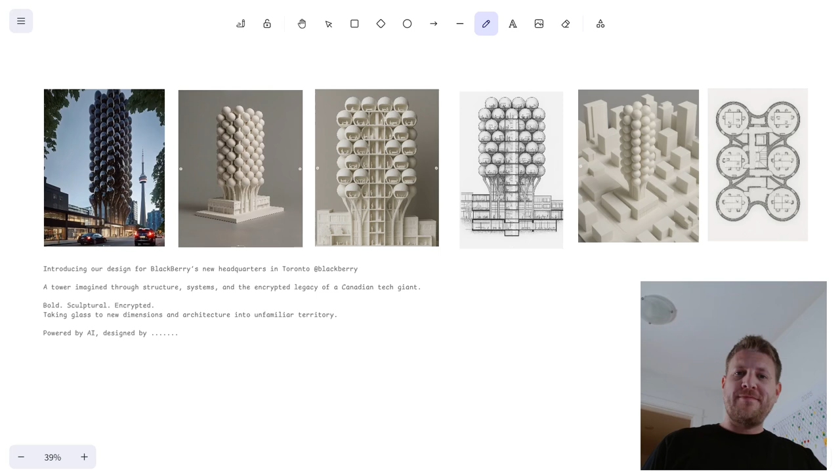Welcome back to another architecture video, and today we're talking about artificial intelligence. It's all the rage, it's absolutely everywhere right now.

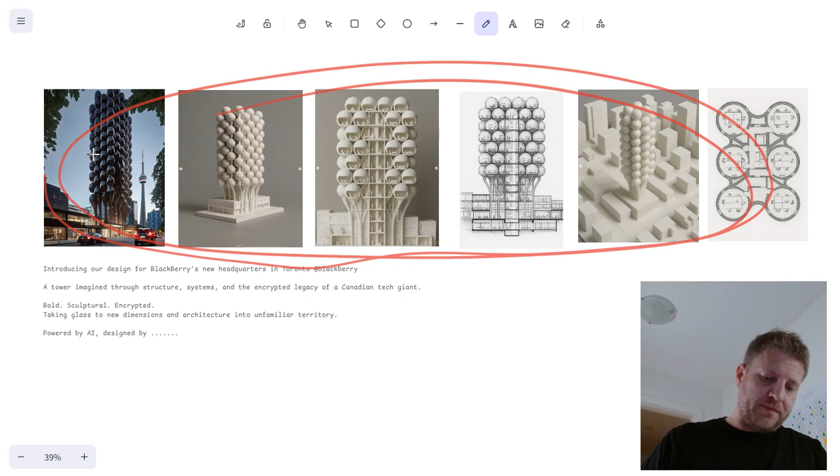So I saw this post on Instagram the other day. It was this handful of images, all together in one post, and they're compelling images. It kind of caught my attention, like, oh, that's a cool looking building.

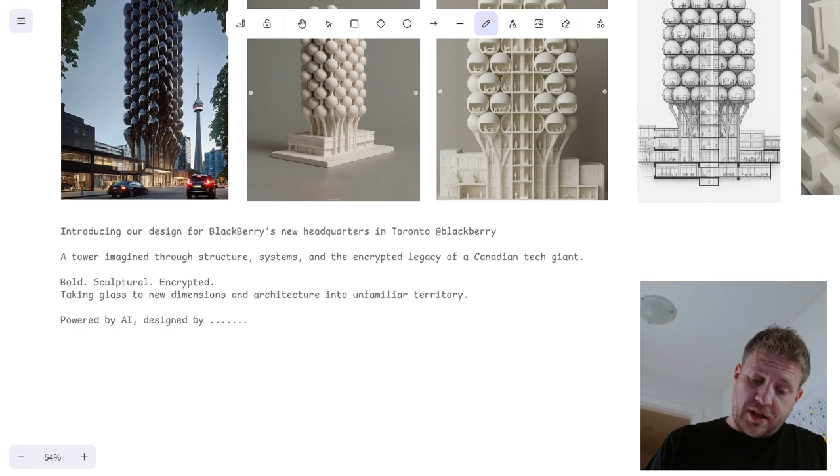And this is what it said: introducing our design for Blackberry's new headquarters in Toronto, and then they tag Blackberry. You can totally understand where this came from, as soon as you mention Blackberry, this kind of looks like a big stretched out Blackberry. I'm wondering, the fact that they tag Blackberry makes me think this probably isn't their actual client, and they're kind of looking for attention. Because if this is what they're actually presenting to the client, we're in trouble.

This is not good, because we'll get into some details in a minute about why artificial intelligence, AI, it's not quite there yet. It can make some really compelling images, sexy, beautiful images that keep your attention, that capture your imagination. But when we get into the details, it's not cutting it. It's not to the point where it's super useful yet.

So just back to what they said here. This is the design for the new headquarters in downtown Toronto. It looks like you can see the CN Tower there in the background, for Blackberry. We sort of covered that, looks like a big Blackberry.

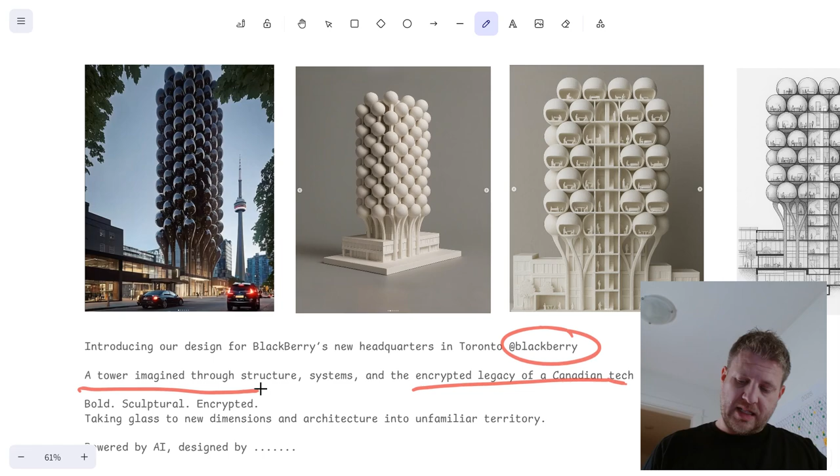Cool. A tower imagined through structure, systems, and the encrypted legacy of Canadian tech. What does that even mean? Sometimes this is where I get annoyed with other architects, they just use this really flowery, fluffy language to try and sell their projects, and I just don't really buy it. I don't know, like what is the encrypted legacy of Canadian tech? A tower imagined through the encrypted legacy of Canadian tech, or I guess a Canadian tech company. If I zoom out, yeah, Canadian tech giant. What does that mean? I don't know.

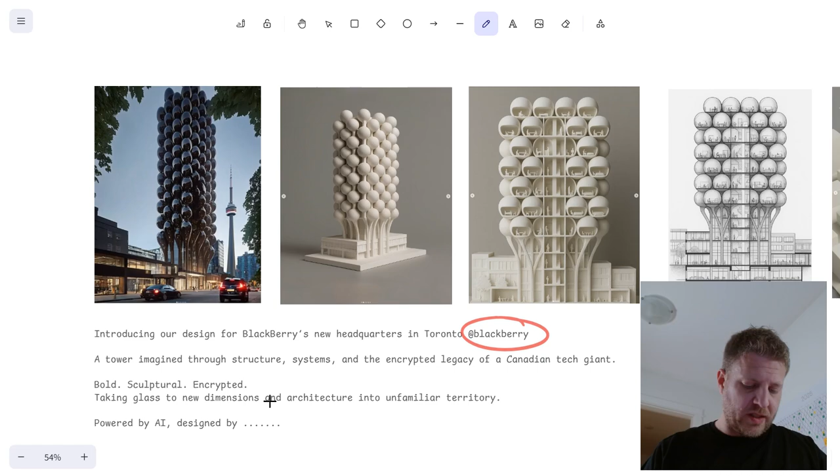I'll come back to this again in a minute when we look at the structures and systems, we'll get into that in more detail. Bold, sculptural, encrypted - again the word encrypted, I don't really get it. Bold and sculptural, yes, I would agree with that. That's a pretty bold looking building. I haven't seen anything like this in real life. It's pretty cool looking, to be honest.

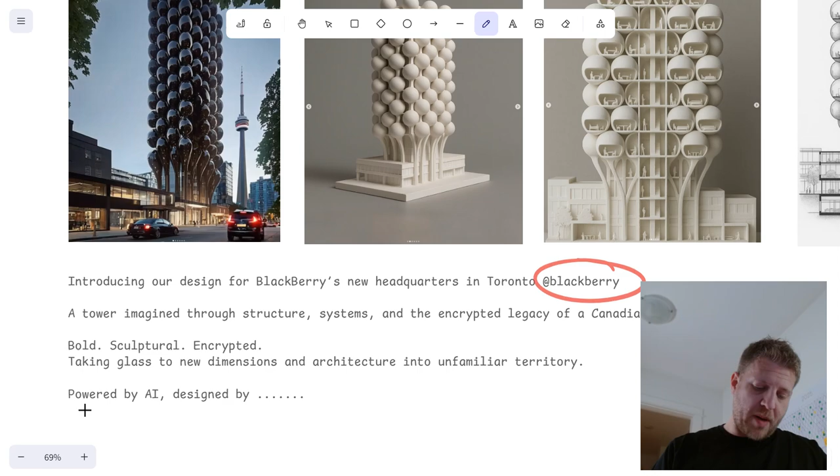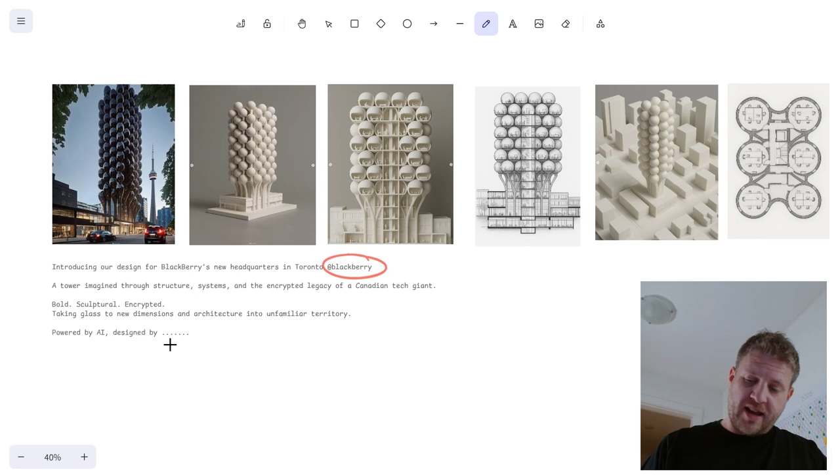And AI is good for some of that, which we'll get into here. So just rounding out the rest of the post: taking glass to new dimensions, and architecture into unfamiliar territory, powered by AI, designed by - I won't say who it is, I don't want to be mean. They're a pretty renowned firm in Toronto. You can look them up, if you search for this you can find them. I won't name them because I actually do like some of their other work. I think they're pushing the boundaries compared to a lot of other architecture firms, kind of a young, up and coming office, and I bet they're going to get a lot of work in the future all over the world. So kudos to them. But to put this out there and say powered by AI, let's get into the details.

This starting image right here, this is why AI is great, because to model this out in 3D from scratch would take me all day to do this. If I was doing it in Rhino with a parametric Grasshopper extension, something like that, I could do it, but that's a tricky building to model.

But you can probably pump that out in like 5 minutes with some really good prompts in AI, right? So this is the kind of stuff where AI becomes super useful, because you're looking for these compelling images that you can pump out really quickly that get your idea across fast. It's not worried about the details, it's just you want that sort of impactful rendering that says, hey, this is kind of our idea, what do you think?

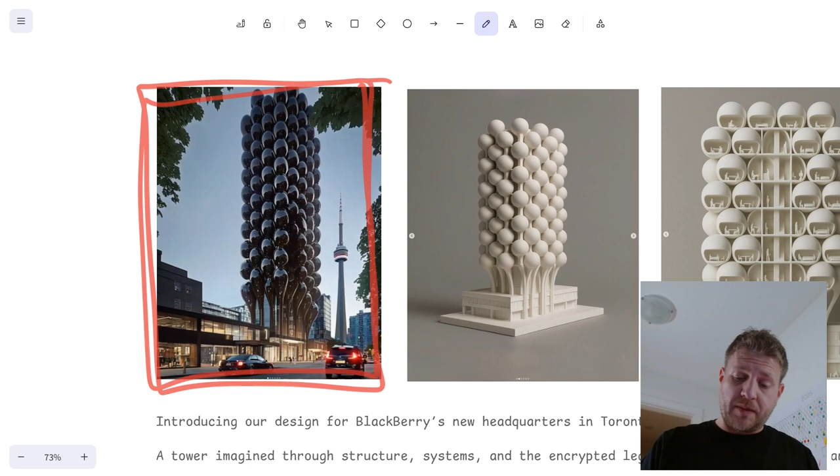And it grabs your attention, which is what you want. You're spending your time iterating on these ideas as opposed to slowly modeling them out. And this is another one. It's clearly not the same building exactly. I don't know how many pods tall it is, but this one's obviously shorter.

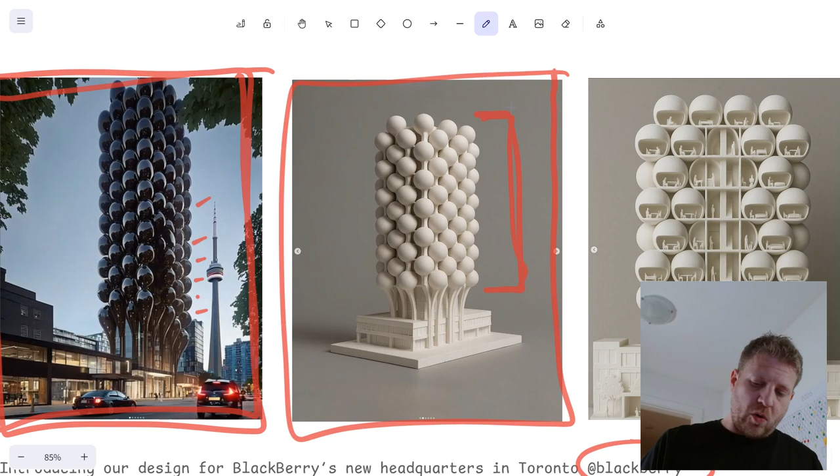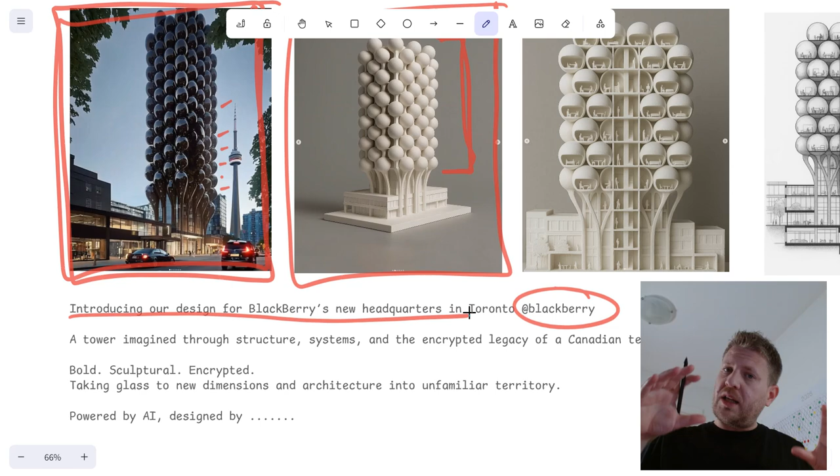And this is where you can start to see this whole design start to break down, because introducing our design for BlackBerry's new headquarters makes me think, hey, this is a finished design, or at least one cohesive design. It's not at all. This is one building.

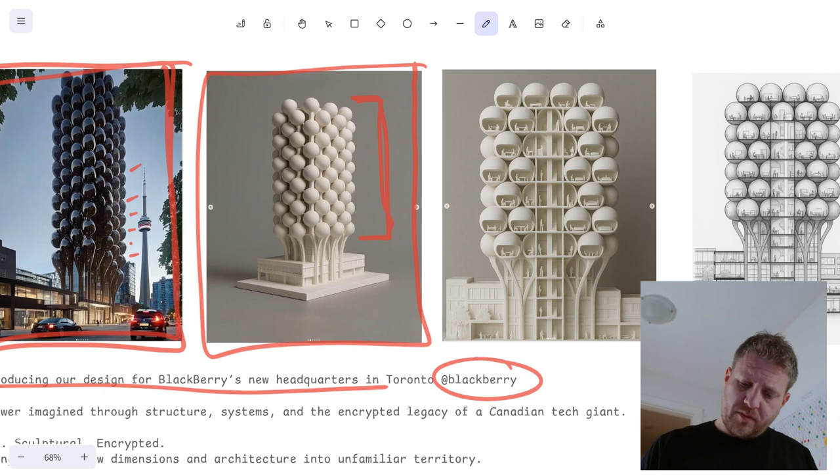This is a very similar building, but it's not the same. It's quite a bit shorter, like half as tall. What about this one? These two look like they could maybe be the same at a glance, but again, it's not the same building. You have at the very top one, two, three, four pods across. This one's got one, two, three below that, whereas this one's got one, two, three, four, five below that. The width of this one and these pods doesn't match.

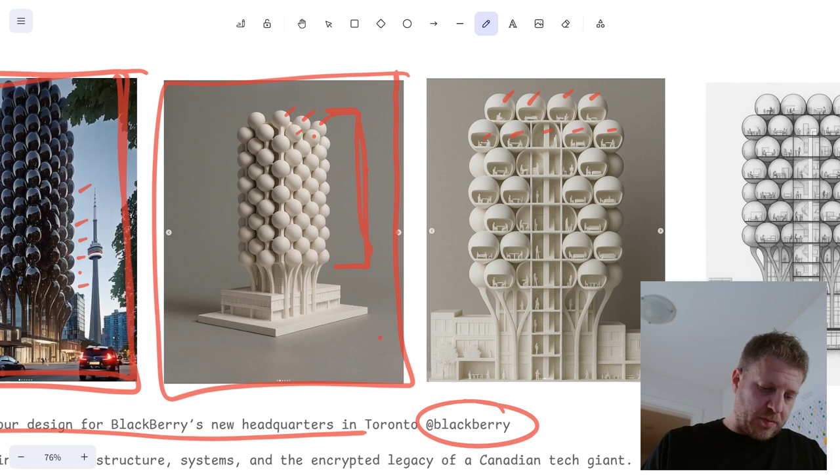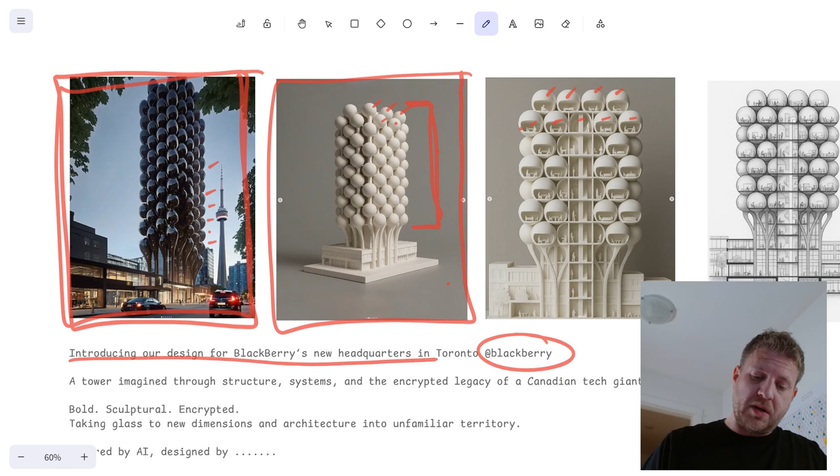Maybe a little closer to this one over here, but again, it's way too short, so it doesn't match, which is fine - that's a minor detail. But still, these three buildings in the first three images don't match. It's not the same building. They're very similar, same family, but it's not the same building.

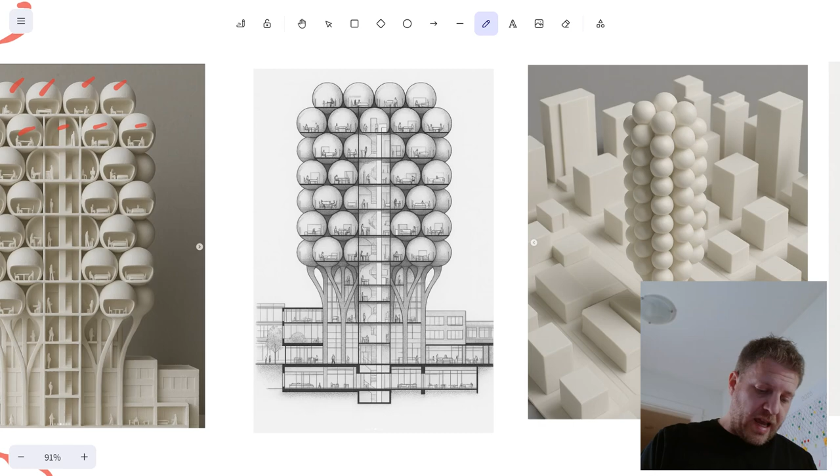Moving on, the fourth image - this looks like an old-timey, hand-drawn rendering. At a glance it's again very compelling, very cool. And I can start to see, maybe with these last two images, where they're saying it's inspired by the encrypted technology of this tech company.

Maybe if you're really trying to stretch it and post-rationalize this design, you could say each of these pods is kind of self-contained, and therefore sort of private, kind of like an encrypted old BBM message if you ever had one of those phones with the push buttons. This was one of the first tech companies that had encrypted communications built in, which is why they used it in government a lot. It was super popular, like, 15 years ago.

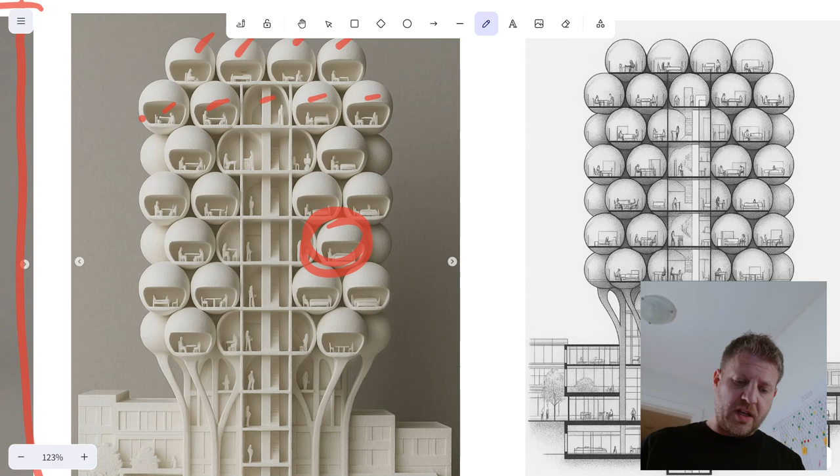So each of these little pods is kind of encrypted, sort of. I mean, that's a stretch to say, but maybe that's what they're getting at. Anyway, back to this drawing.

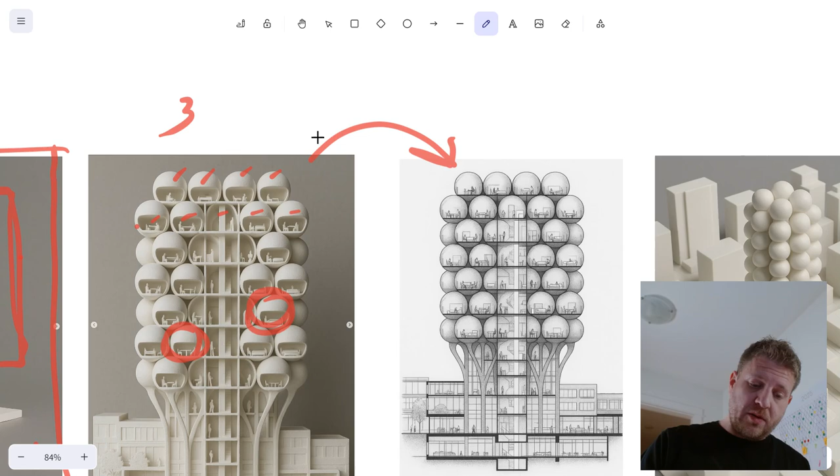Again, does it match the other ones? Sort of - this one's pretty close actually. These two, if we look at those, are pretty similar. These could potentially be the same building. Four pods across the top, next row's got five. It looks to be roughly the same height - I'm not going to count it out.

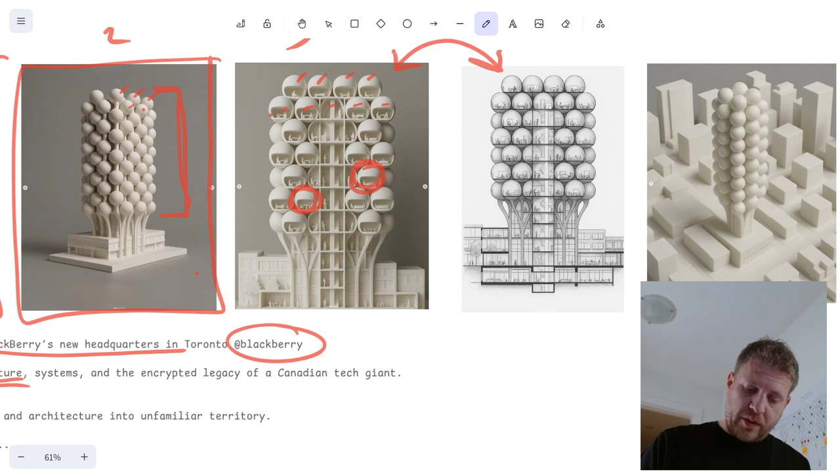It's pretty close. Now, to say this building is 'a tower imagined through structure' - every tower has to include structure, it's important so it doesn't fall over. But if you're really going to emphasize structure, just take a quick look in a little more detail, and it just starts to fall apart.

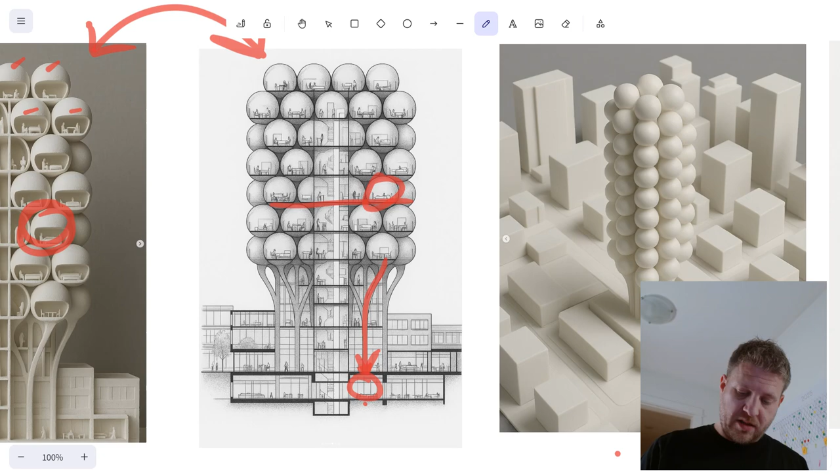These pods, sure, they could be hanging off the main floor plate, whatever, it doesn't matter. But then as you work your way down, look at this giant column, working its way down - it's like 4 stories tall, working itself down to grade, and then what? It's nothing. There's no column taking it down to the basement, down to the footing, nothing.

There should be a giant footing there, kind of like there's sort of a footing here - that's like half a footing, sort of. And that's it, there's really no foundations involved. This is such an unrealistic drawing. For a building this size, a big tower, you need massive footings down here, and there's nothing. It's really missing the technical aspect.

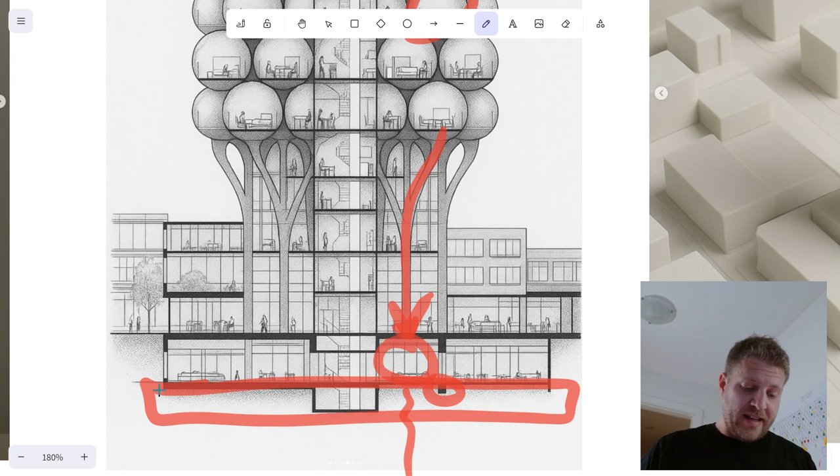It's good at these imaginative, really interesting, compelling images, but then when you dive into the details - the technique, the structural detailing, the technology - it's not quite there. It's really lacking in the technical aspect.

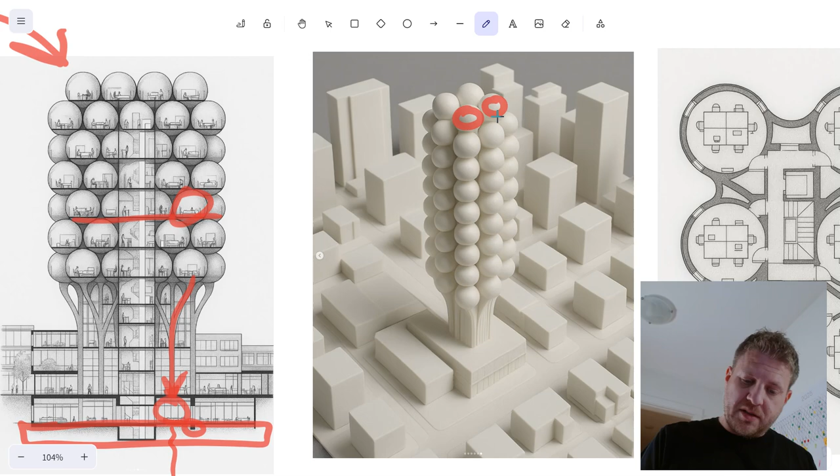But okay, we'll give it some grace period and move on to the next image. Again, this looks like a completely different building. When you look into the details, this one's only got 2 pods spanning the top, the next row looks like it's got 3. That doesn't match any of these.

So again, totally different building, not one cohesive design whatsoever. The base of the tower looks quite different, very skinny - little podium, sure.

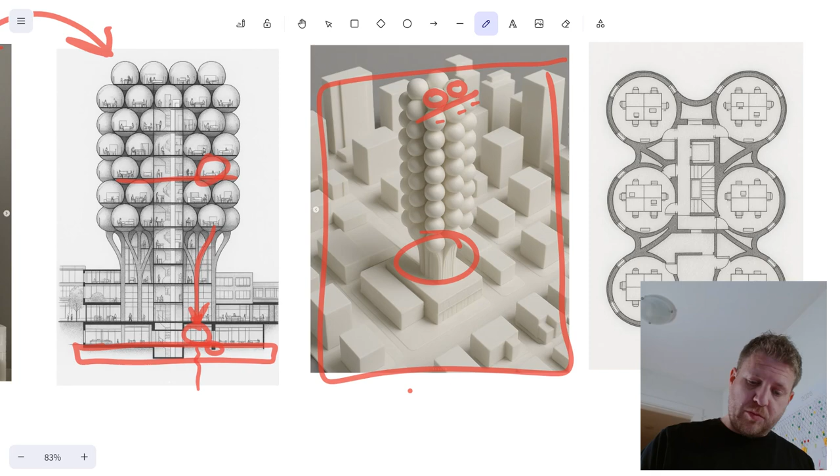It's kind of a cool image though, in itself, right? Because it's mimicking like an old 3D printed model or an old wood model, something like that. They're cool images, I like them. But again, it doesn't really link up with these other drawings. It's just not quite the same.

And where things really start to fall apart is with this last image here. This is a floor plan. We'll dive into that here.

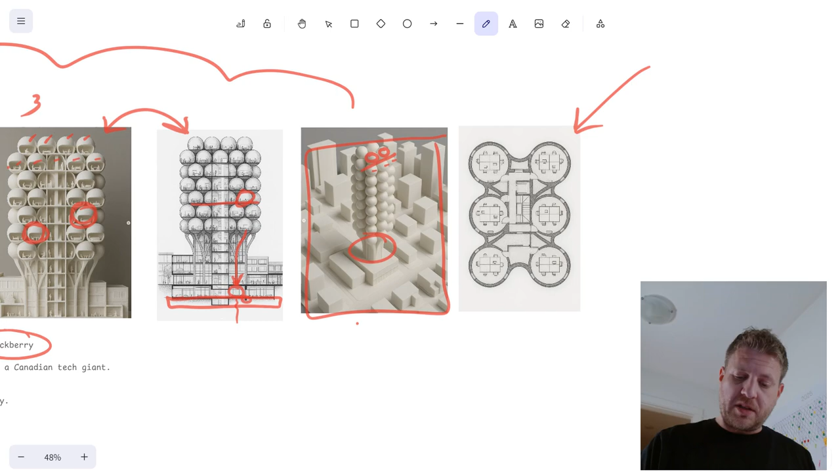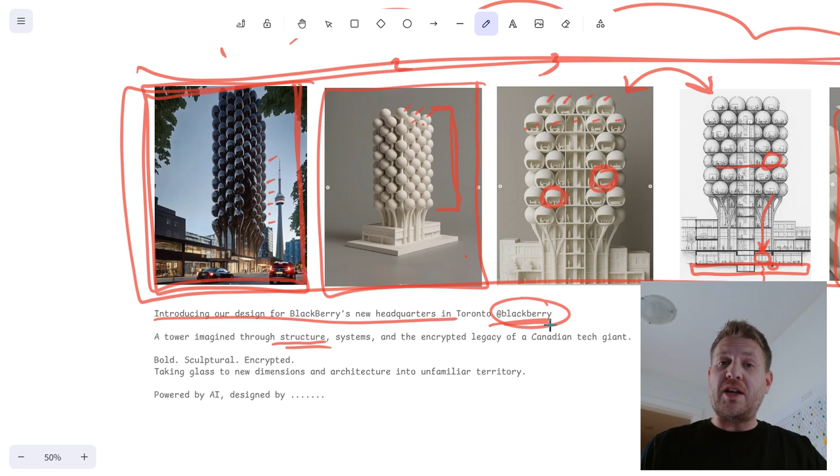I should give them some props. I do like these as images, I think they are compelling. If you're trying to sell your idea, if you're trying to get BlackBerry on board as a client, it doesn't hurt to show some flashy images and say, look what we can do, this is totally possible. And I would say it is probably possible, but it's insane as a building.

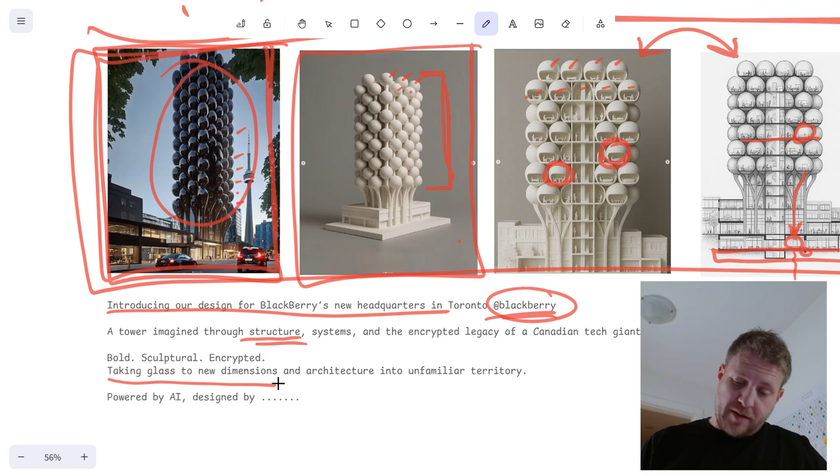They're saying this is all glass, right? Each one of these pods is glass, I'm assuming because they're taking glass to new dimensions. Sure, it's a big glass bubble, which would cost an absolute fortune to manufacture. And when you look at all that lost space, you're paying for all that glass, it's going to cost you like 4 times as much, but you're losing all this floor space in between. So you're paying 4 times as much for half as much actual building.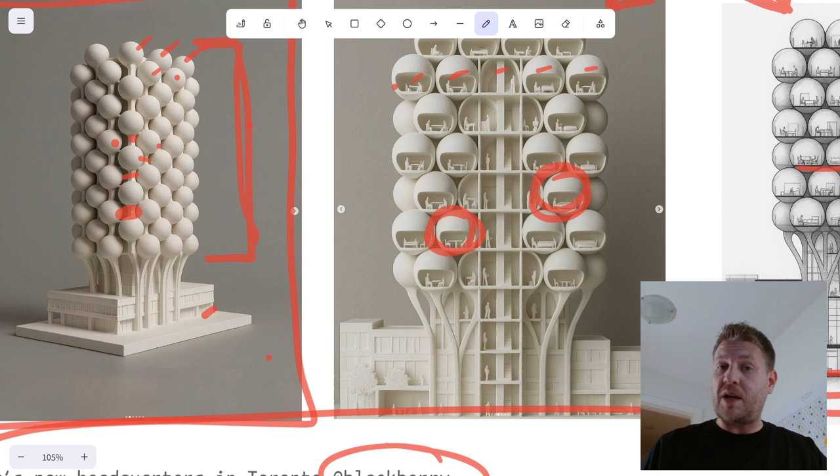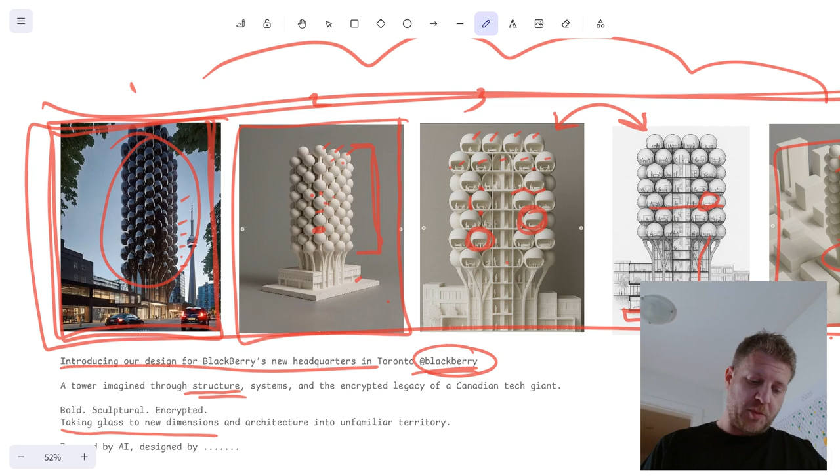Look at all the wasted space in between all these, right? You're still paying for that because it's part of the building, but there's nothing there. It's just wasted empty space, all that interstitial space. As a design, I don't love that at all, it's not efficient whatsoever, it's a complete waste of space. But it's compelling, and maybe that's all they're going for, right? Trying to get BlackBerry's attention and get a job out of them, which sure enough.

But anyway, let's go back to this last drawing, because I actually left a comment on this one and just said, hey, these images are cool, but this floor plan is horrendous. Let's look at why. Again, does this match the other images? If anything, this one maybe matches this guy here, right?

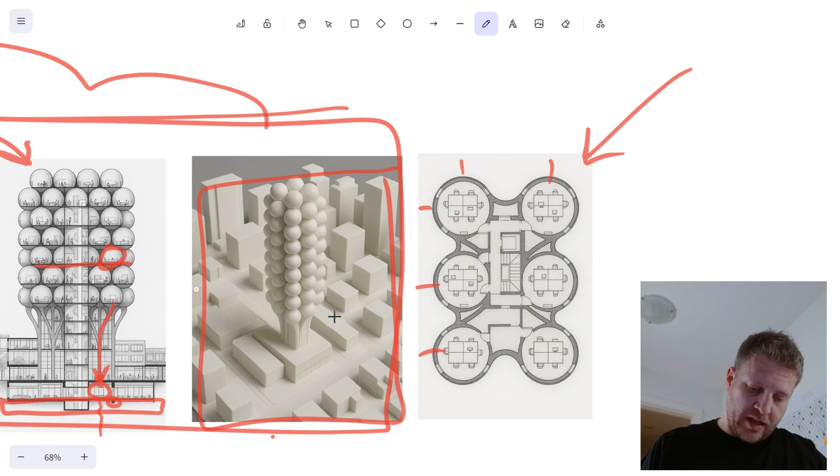It's only a couple pods wide. This one that we're looking at is 3 pods wide or long, 2 wide, 3 long, however you want to look at it. That sort of matches this, sure. So I would say this plan is closest to this drawing right here. Doesn't really match the other ones, which is fine, we've kind of established that is okay, doesn't matter at this point. Is what it is. But going back to this plan, where do we even start?

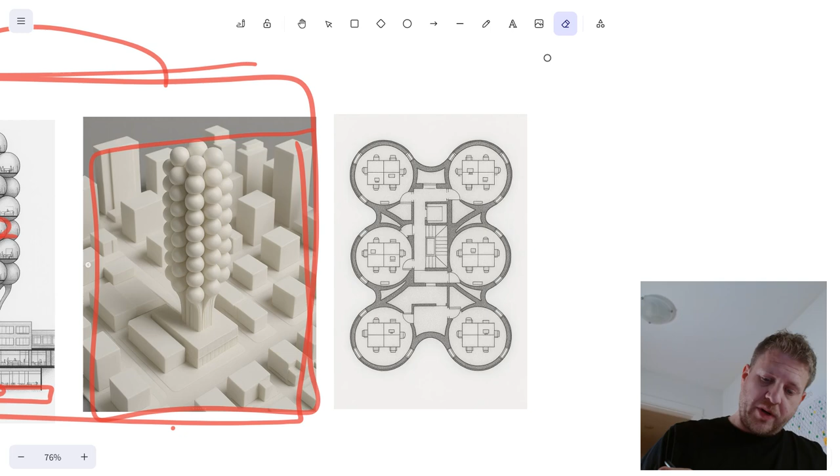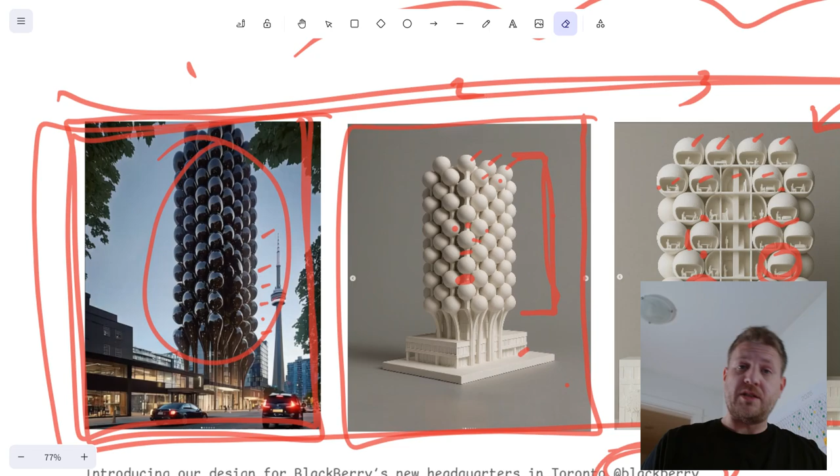Let me just erase that and let's start fresh here. This is a multi-story office building in downtown Toronto. We know that because it's for BlackBerry, it's an office, it's downtown Toronto according to their image. Guess what? You can't have a Part 3 building with one exit stair in Canada. This is just completely against the law.

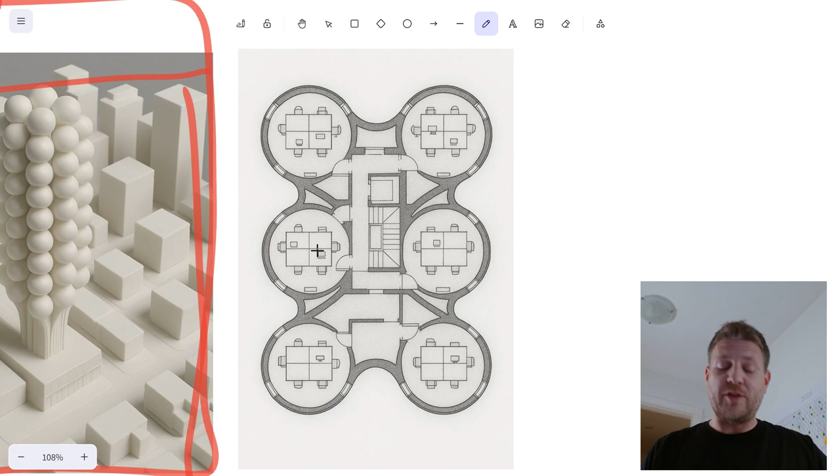You can't do that. For safety reasons, you have to have 2 exits in a big Part 3 building like this. And the fact that they're putting it out saying, hey, look at this awesome design that we have for BlackBerry, which is completely illegal. I don't know, you're not doing yourself any favors by telling people that you did this, quite frankly. It's like, if you put effort into this, and this is still what it looks like, all right. So that's just one, that's one big one right off the bat.

But then let's look at the details, right? We talked about wasted space in the floor plan, and this is where it really starts to show up. Because what is this space? What is this space? What's that space, a closet? What's this space in here? What's that, what's this wasted space? What's this, what's this kind of empty closet? It's so inefficient, there's just nothing in those spaces.

I mean, realistically, if this were an actual building, some of those would get used up by building services, right? You need water, you need heating and cooling, you need air circulation, you have lots of wiring, pipes and ductwork, all that stuff's running through some of these spaces. So maybe this one here, yeah, you have a pipe, you have another couple pipes.

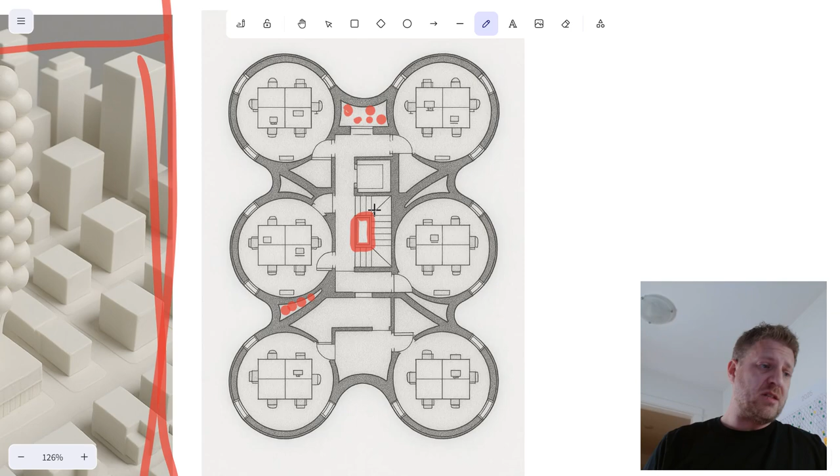Becomes your mechanical chase, and then you have an electrical one over here, and maybe you have a mechanical one with some. Maybe that's this one kind of in the middle that they're showing there. That would be pretty standard actually, to have something in the middle of the floor plate where the services can run vertically and branch out at every floor, so they're not all wasted. But the way they're showing it just doesn't really make a lot of sense. Clear those out of there. So that's one issue.

So if we just start to actually look at the plan itself, say you pop out of the elevator and you want to go to your office up here. Sure, you go up this way. Look at that door. This door is first deleting space from this wall with no tolerance. It's kind of a door into a closet, let alone the office. Same thing over here. You have a door, but then you're gonna walk into this little pointy nub that's sticking out and stab yourself on the wall.

And if we get rid of those, the actual door frame, go down to a smaller pen size here. Is it a smaller pen size? Yeah, it's the smallest it goes. That actual door frame, it's not even on the wall, right? Look at that, it's off the wall. So that's ridiculous.

Even the chairs, look at the chairs in all of these offices, they're all different. Like that's your office chair, okay, that's kind of a chair. This is like half of a chair with an arm on it. This is a different style. Same thing over here, this one doesn't match this one, doesn't match this one, doesn't match that one. It's just so inconsistent. It's just scraping the internet to see what an office chair looks like and putting some in one place, some in another place, merging them together in other places. It just doesn't really make a lot of sense.

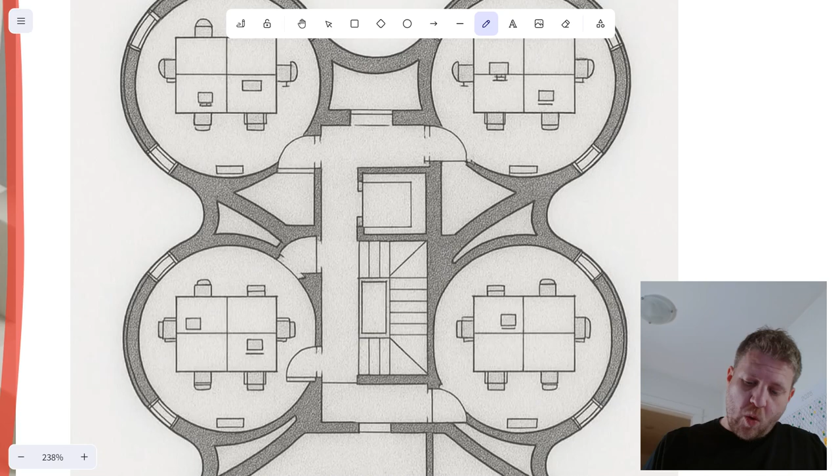What else? Where else do we? Let's move down here a little bit. We looked at those doors. Actually, before we move down, where's this window looking? Into an empty shaft? Cool, nice view from the hallway. That's just a complete waste of everyone's time.

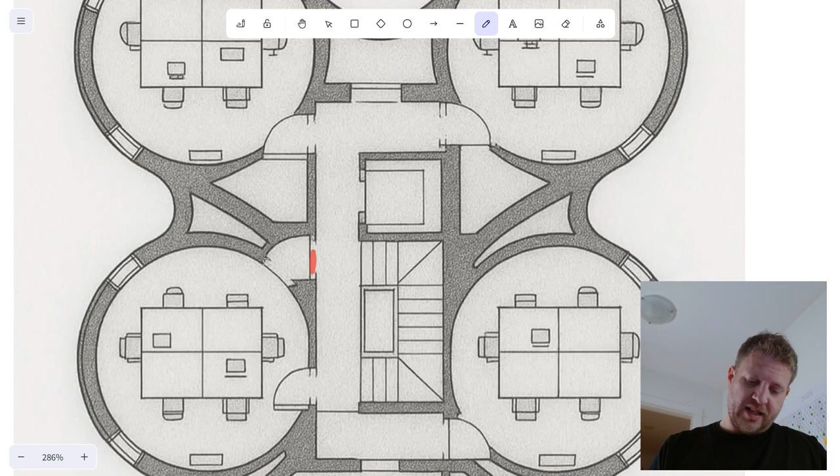Why would you bother? This one's like half a doorway. You can see it kind of put in the door frame, like thresholds, kind of, and it's got almost a door swing, but it didn't quite do it. And the way it's showing that there's like a piece of glass there or something, that doesn't make any sense.

This is probably the best door on the plan because it sort of makes sense. It's actually in the wall for once and swinging in, not bumping into anything. Sure, kind of like this one is bumping into this wall right here. Makes no sense. Come down here.

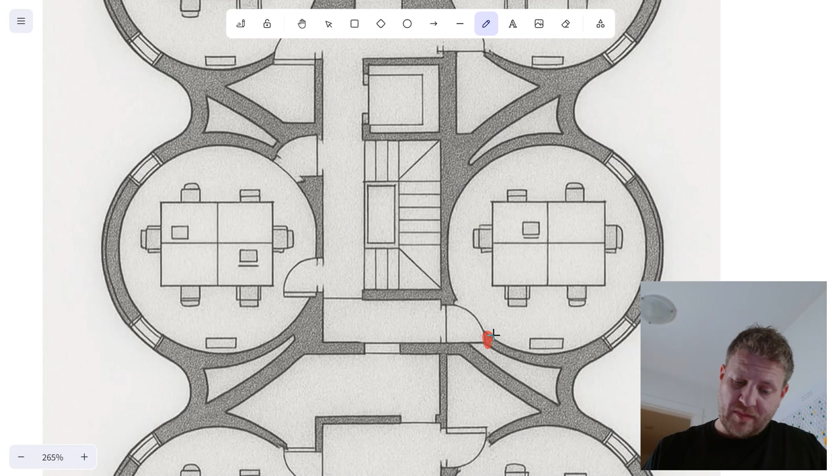I don't know, is this a doorway? Is that a doorway? It's got a threshold. I don't know exactly what's going on there. Same, what's this line? What are these two lines? What's that line? Don't know.

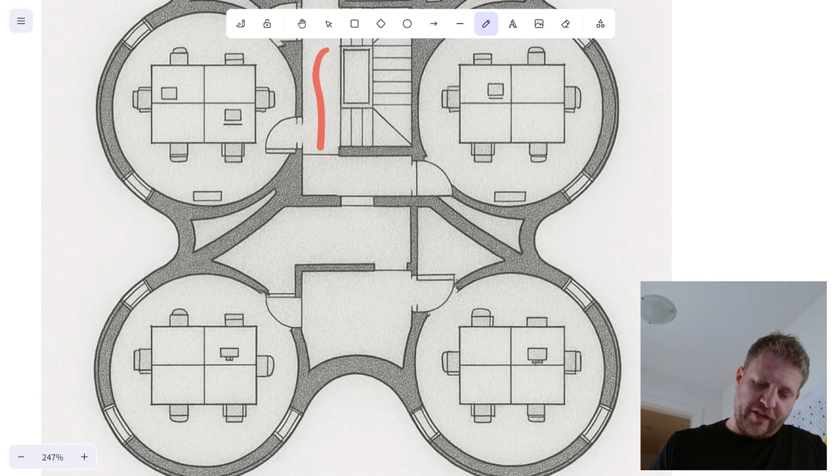So again, you come out of the elevator, you come down here, you go through this weird zigzag. You want to go to this office, then you go through this door and then this weird kind of closet room.

And then you go through here, but this door swings into this gap, which is part of this lobby space, like there's a receptionist in there. These are just so non-functional.

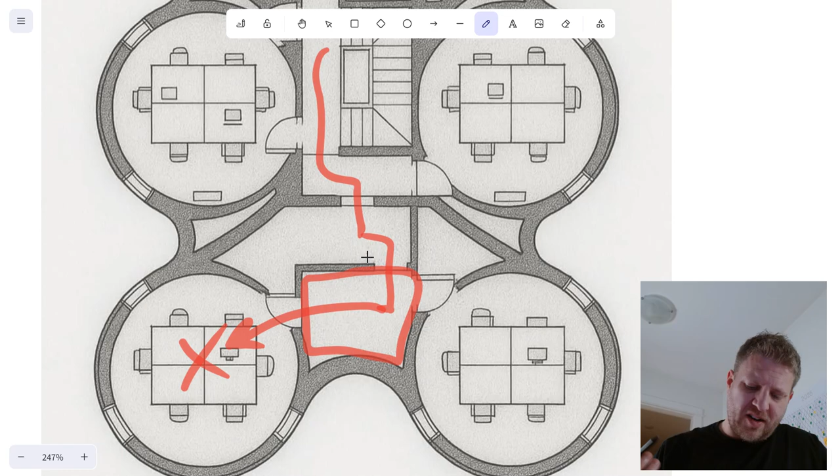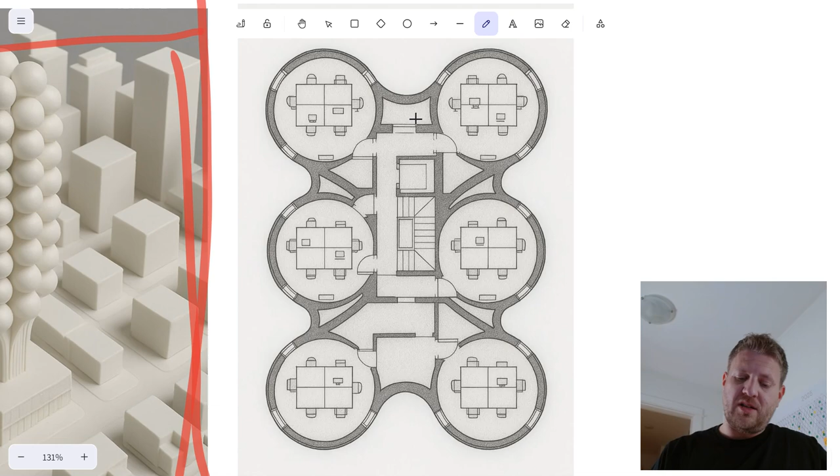If we're actually going to talk about functional spaces and what an office needs, in terms of a receptionist or bathrooms, is this a bathroom in the office? Is this the one with the window looking into it? No, there's no bathrooms shown here, so I guess you got to go up or down a couple floors to use the washroom. Super convenient. Not really. That's terrible.

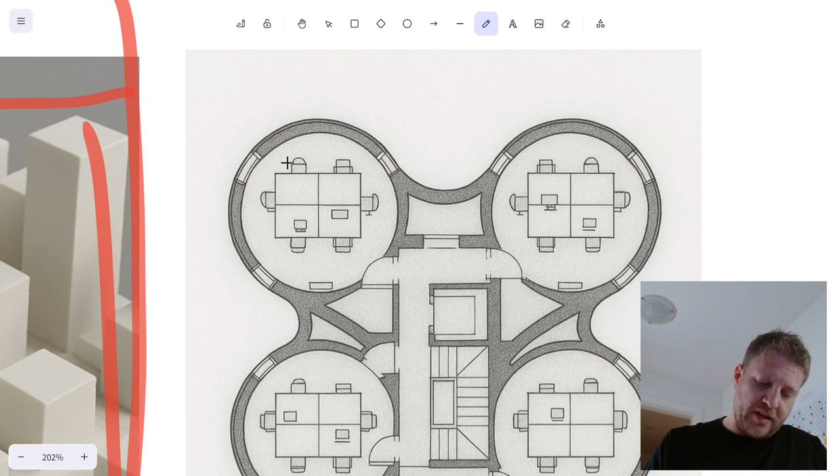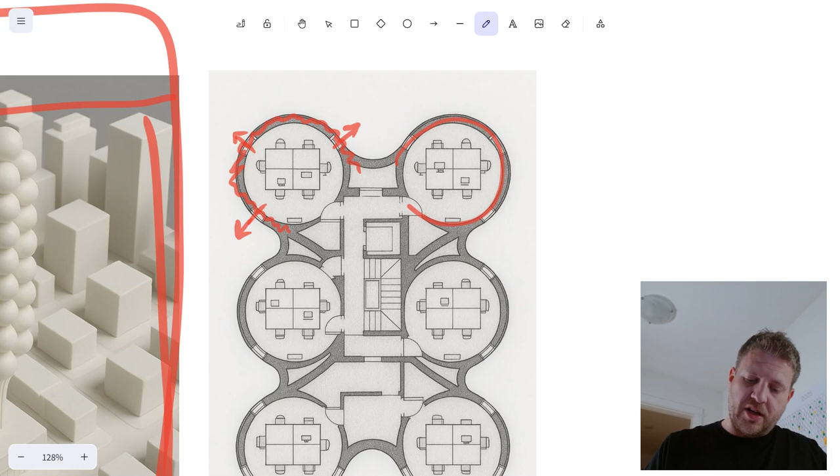What else? The windows, sure, except look at the best example of this pod in terms of windows. Take a corner unit: window here, window here, window here. So you get three little views out through what looks to be a pretty heavy, solid concrete wall that goes through 90% of the perimeter of that private office. But that's not what's being shown here whatsoever. That's the complete opposite. These are saying, hey, this is all glass, look how transparent and cutting edge our building is. Meanwhile you zoom over to the plan and it's like 90% concrete with a couple little holes punched in it. It just doesn't even match that first image whatsoever.

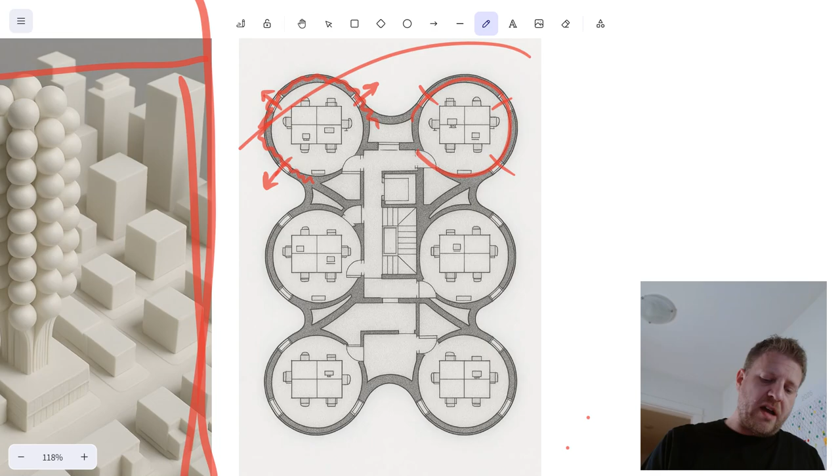This is where these AI generated images really start to lose me, and it gets annoying when you see this stuff going crazy online and people are saying look at this amazing building, but it's just got stairs going up into a wall, and there's a door opening off a third floor balcony into nothing, and the levels don't even make sense. AI doesn't have the ability to make sense of this stuff yet.

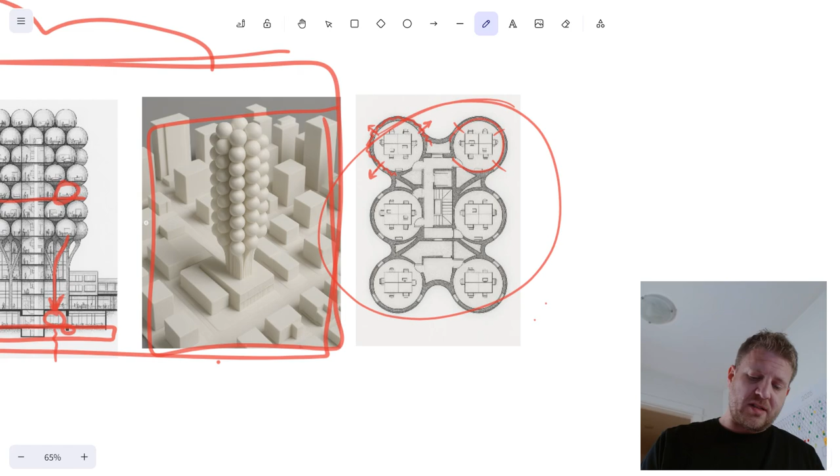It's really good at pumping out sexy, compelling images that draw your attention and at a glance say, oh that's awesome. A lot of people did say, oh this is a sweet building, I would love to see this in Toronto, because there's nothing like this. But then when you get into the details of it and the technicals, it's not there.

Not to say it won't get there eventually, but at this point in time it's kind of a tool for making ideas. It's a starting off point because you pump in a prompt that says something like, hey, I want an office tower that looks like a Blackberry, and you get some of these really cool images, right.

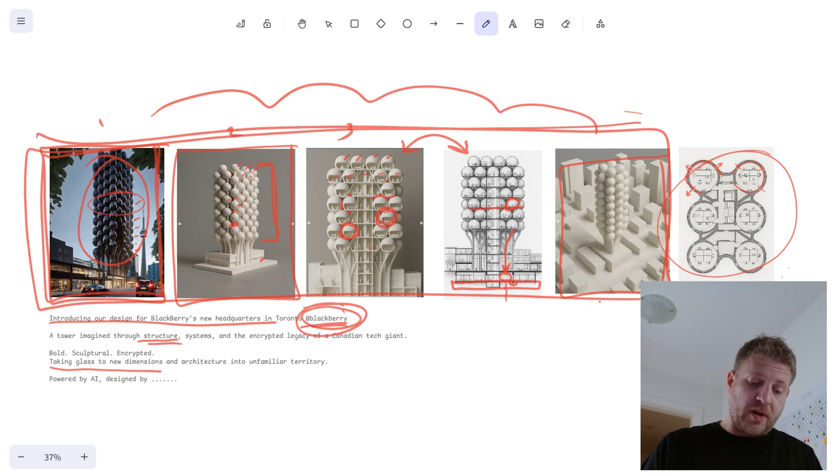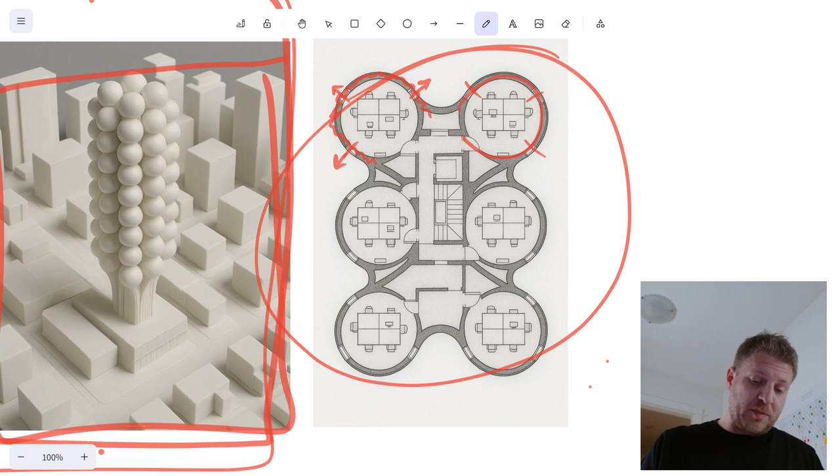But that's your starting off point. Then you actually have to get into the details yourself. If you're a designer, an architect, in architecture school, whatever it is, you have to work through it and try to make sense of it and make it work, because this just doesn't. It's kind of a ridiculous plan, and to go out there and say you spent some time on this and you're putting it into the world, it's kind of embarrassing.

It is what it is. It'll get better, I'm sure, but put some more time into it, put some effort into it. Use it as a jumping off point, and don't just spend 10 minutes prompting out some images and throw it out into the world saying, hey look at this cool thing I did, because a lot of the time it's garbage, and that's kind of what this is. It's AI garbage.

So anyway, that's the end of my rant, I'll end it there. It is useful, it's a useful tool, I'll use it in the future, and I'm sure I'll do more videos on AI as well, but we have to be better, and you got to police this stuff. When you see this stuff online, call it out, like hey, this is a joke, what are you doing?